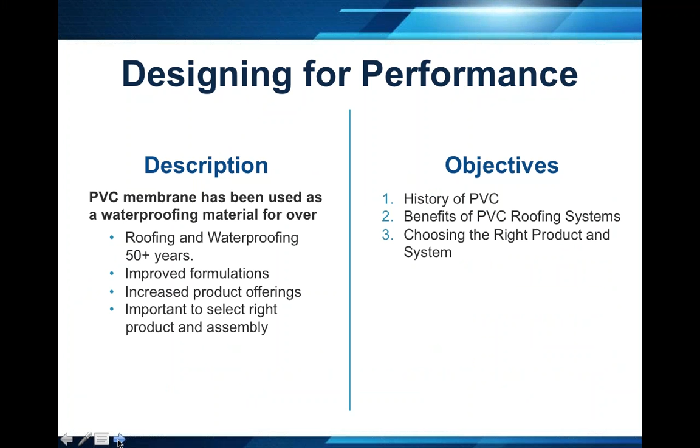We'll cover the history of PVC, the differences in the formulations of PVC, the different ways that PVC is installed, and we'll look at some of the different types of reinforcements for PVC.

A look to start off with two red cars. They will both get you from point A to point B, but other than that, there are big differences in the performance characteristics of the two red cars. Just because they'll get you from point A to point B doesn't mean they're produced exactly the same and have the same performance characteristics, and that's really the same thing with most products that are produced. There's big differences in the way you can produce them, formulate them, etc.

When we talk about PVC, there are differences in the formulations of PVCs, but in general, PVC is considered a very high-performance single-ply roofing product because it's very chemically resistant and it is environmentally responsible.

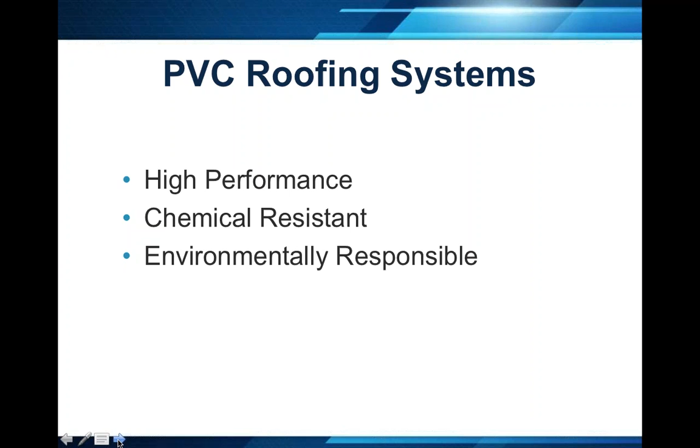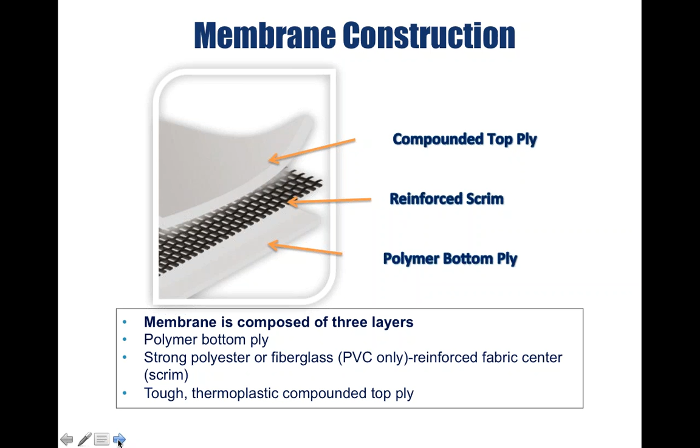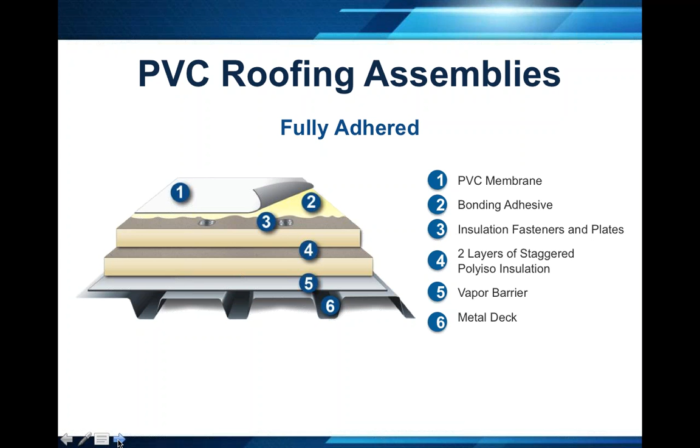Typical ways that we would install PVC roofing are mechanically attached applications. In this slide, you have a 22 gauge metal deck, multiple layers of insulation, and a fully adhered membrane. You can also have a vapor barrier where needed and appropriate, with insulation systems. PVC is also used in fleece back systems, which we'll talk about a little later in the presentation.

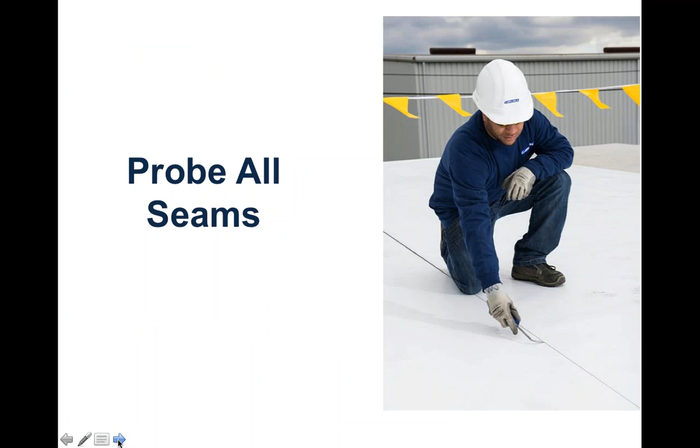All these systems will use heat welded seams. They are a thermoplastic product, and at the conclusion of heating the seams, you'll let it cool approximately 30 minutes, and then you'll probe the seams.

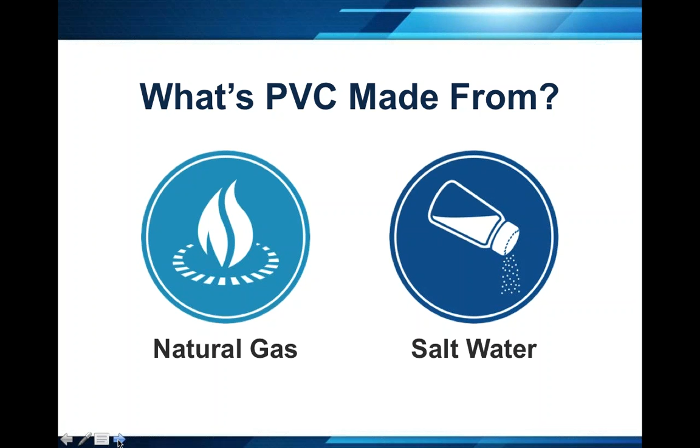A little history: PVC's two main ingredients are natural gas and salt water, so it is not a petroleum-based product. You have natural gas, which you'll crack to extract ethylene, and then salt water will go through an electrolysis process to extract chloride. Combining those two ingredients, you'll come up with a vinyl chloride monomer gas, which will be exposed to UV light, and that will turn it into a white powder PVC resin. Of course, it takes a little bit longer than the brief description I just gave you, but that's the long and short of the ingredients that go into PVC.

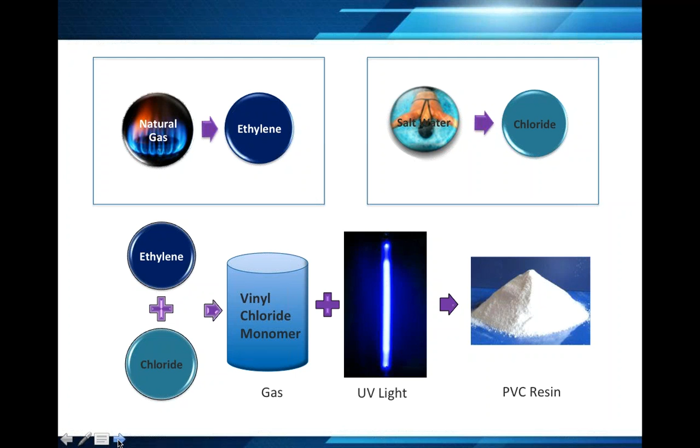From there, you can add plasticizers to that PVC to give it varying degrees of flexibility. So PVC can be rather stiff and hard, or it can be rather flexible. In the roofing industry, it's going to be rather flexible.

PVC has been around since 1838 and first started being plasticized in 1926. It's used in a wide variety of products: the medical industry, saran wrap, shower curtains, grill covers, and many other applications.

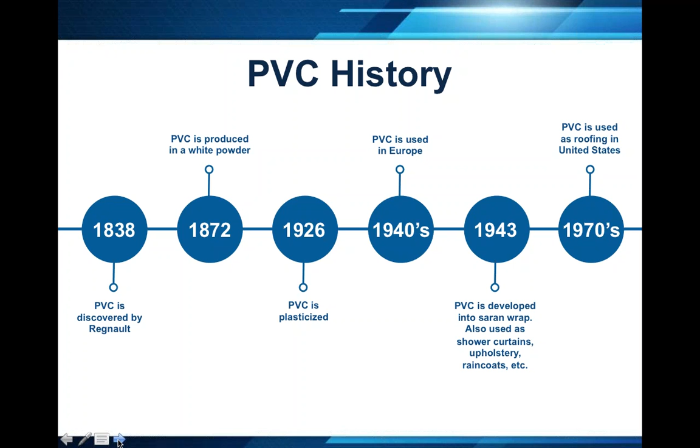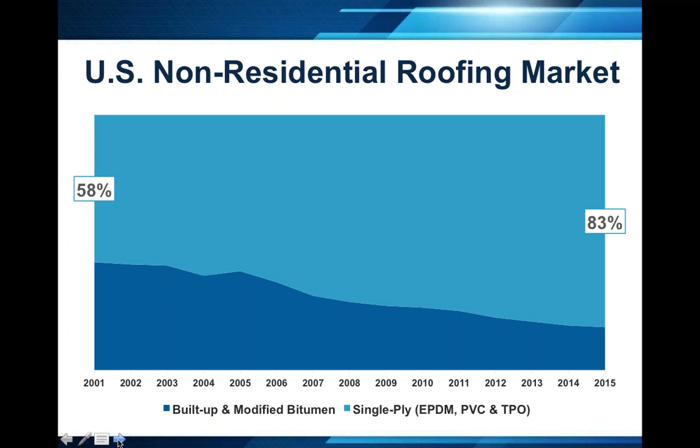PVC, as part of all single-ply roofing, has been growing in demand continuously for the past 15 years. Back in 2001, single-ply only accounted for 58% of the total low-slope roofing market. As of the end of 2015, single-ply roofing—meaning EPDM, PVC, and TPO—accounted for 83% of the total low-slope roofing market. So single-ply in general has been on the rise, and there are many reasons for that: one being ease of installation versus other product categories, cost is always a consideration, and there's been a growing demand for white reflective roofing over the past 10, 15 years as well.

PVC is also involved in a lot of different product segments within the PVC category. You have standard polyester reinforced PVCs, which is the largest percentage of PVC roofing applications, and you have fiberglass reinforced, strictly used for fully adhered applications.

As mentioned earlier, you can have fleece back, which is a polyester fleece on the bottom side of the PVC membrane. There's also a formulation called KEE, an enhanced plasticizer for PVC, which we'll get into later. PVC can also be made into various colors. Typically it's sold in white, but there's gray, tan, and specialty colors. There's also a metal profile product, a rib used in conjunction with the flat membrane to replicate the look of a standing seam metal roof.

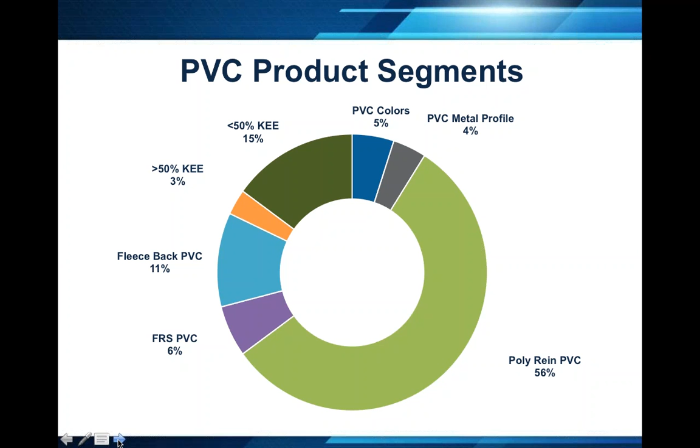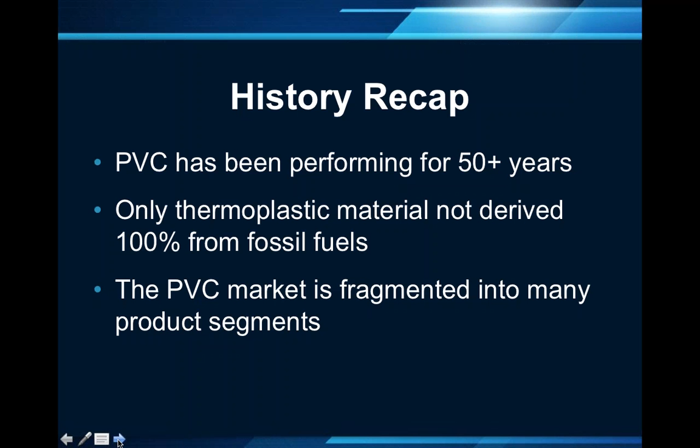Quick history recap: PVC has been performing in roofing for over 50 years, and it's the only thermoplastic single-ply membrane that doesn't come 100% from fossil fuels. And we talked about the various fragmented sectors of the PVC markets.

Some of the key benefits of PVC: the biggest benefit is that it has a long-lasting track record, being used in the U.S. for over 50 years. Of all the single-ply systems, PVC is the most chemical resistant, in terms of jet fuels, diesel fuels, also animal fats and vegetable oils.

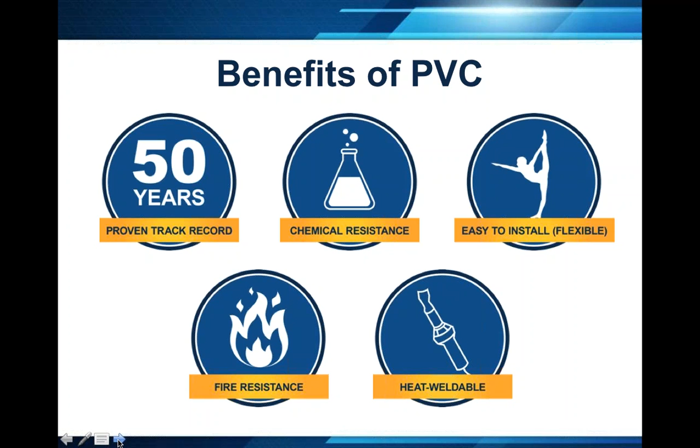The other nice thing about PVC is that it is very flexible in both cold and warm temperatures. And of all the single-ply systems, it is the most fire resistant, and we'll talk about that. Being a thermoplastic product, the seams are heat welded, so you're not utilizing tape or adhesive for adjoining side laps and end laps of this sheet.

Talking about fire resistance, PVC has the best testing for spread of flame and burning brand. Spread of flame measures the distance a flame will spread in a certain period of time. This is important because if you have a fire within a structure, you don't want flames coming out of a window and over the top of the roof system and spreading. Burning brand is resistance to embers that might land on the roof from a structure on fire, perhaps next door.

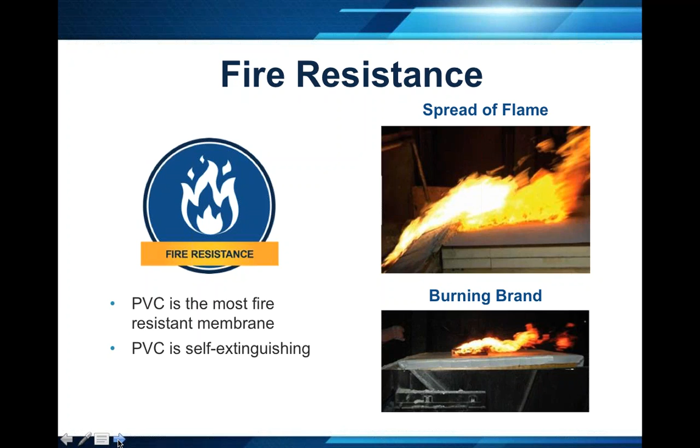One of the things about PVC is that for burning brand, it is self-extinguishing, so it doesn't contribute to that source of fire. From a workability standpoint, the heat welded seams with PVC actually have a bleed out, so you can see that you have a proper weld if you're looking at some bleed out in that weld. It's a key difference between a TPO and a PVC product.

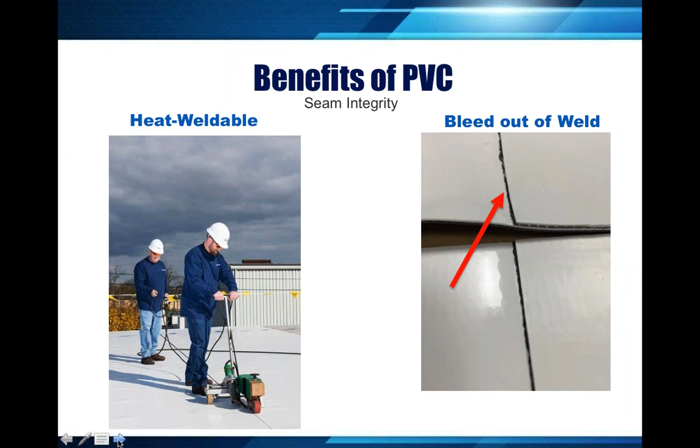It's a very sustainable product as it has a long lifetime. You can recycle PVC membranes that have been in place. In the manufacturing process, there is not a lot of energy used to produce the product. So with the recyclability of PVC, you have a lot of environmental attributes for the product. Because it's white in color, it can contribute in certain market areas to potential energy savings due to reflectivity. But each market is different, so you have to check the specifics of the location you're in.

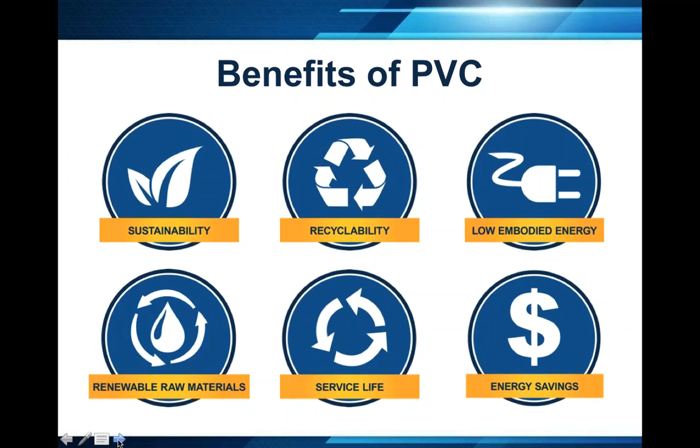That weathering package is contained in the top ply of the PVC membrane, so that top ply will be more expensive than the bottom ply. That top ply has to provide heat resistance, UV resistance, and abrasion resistance for foot traffic.

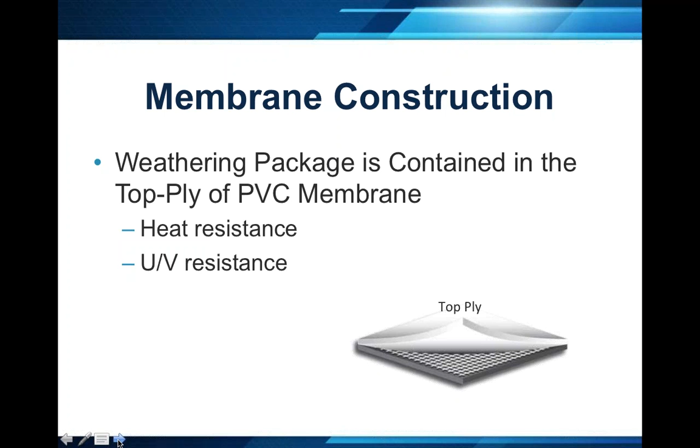The common types of reinforcements: the most popular is a polyester reinforced sheet. As mentioned earlier, there's a fiberglass reinforced product for fully adhered applications only. You have KEE, ketone ethylene ester, and KEE HP, high performance polyester reinforced, and then fleeceback, reinforced typically with fiberglass, but it can be reinforced with polyester as well in certain instances.

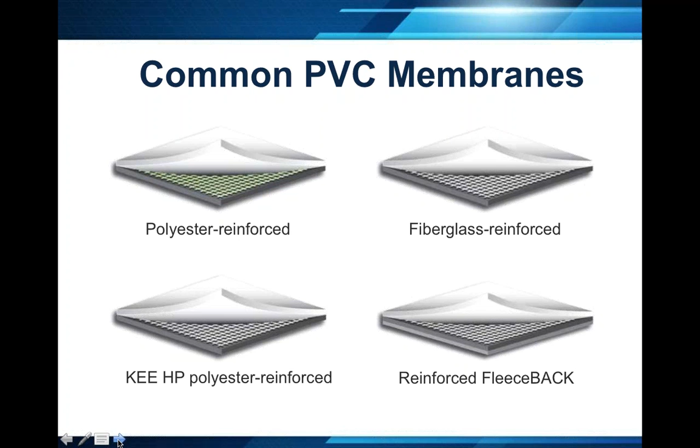The main ASTM standard for PVC is ASTM D4434, which calls for physical properties content and polymer content—two aspects to that standard. You have to have a 50% or greater PVC polymer content, and there's a minimum thickness criteria and minimum thickness over scrim. The minimum thickness is 36 mil, and the minimum thickness over scrim is 0.016.

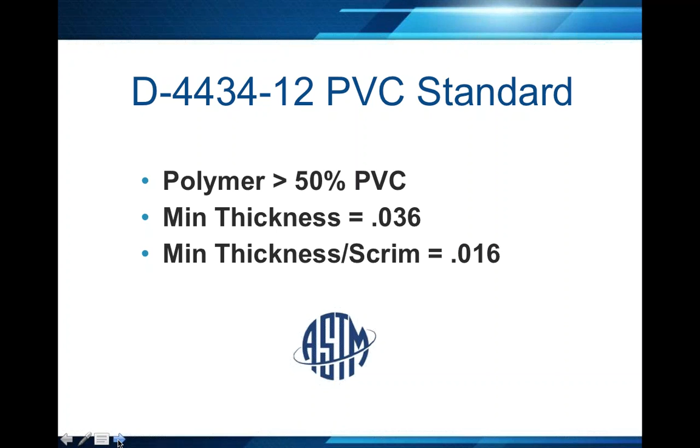Within that ASTM, there are different types. You have type 2, which is fiberglass, and type 3 and type 4, which are polyester reinforced. They have different minimum thicknesses and differences in tearing and breaking strength between type 3 and type 4.

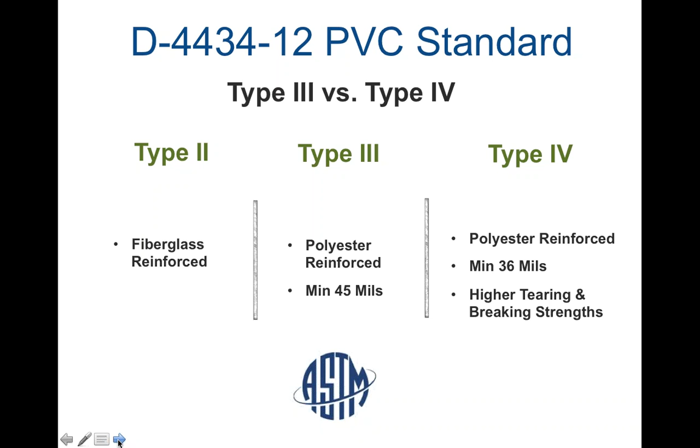For example, type 4 would have a higher breaking strength, 38% greater than a type 3 material. It would have 66% greater elongation and 100% greater tearing strength in type 4 versus type 3. So ASTM D4434 type 4 would provide you with the best characteristics in those categories.

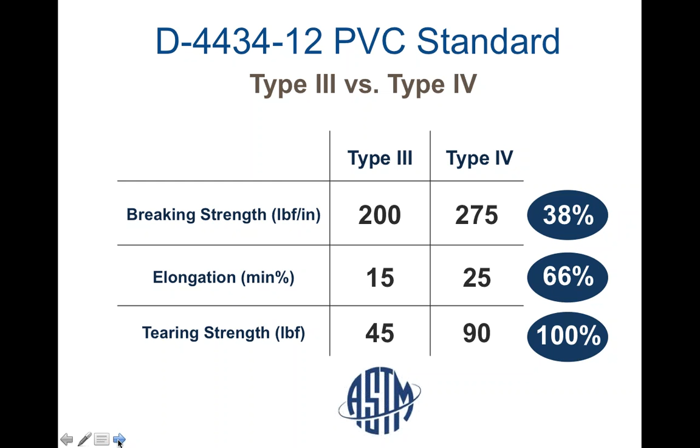When we look at the difference between a polyester and a fiberglass reinforcement, if it is mechanically attached, it has to be polyester. So we're really looking at a fully adhered application.

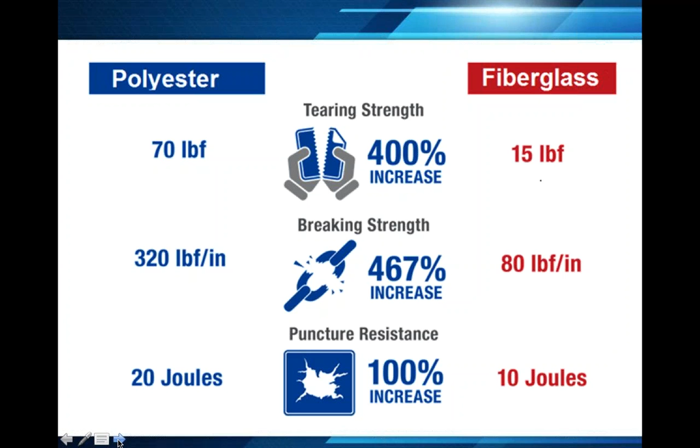In that fully adhered application, polyester would provide a 400% increase over fiberglass in terms of tearing strength, fiberglass being kind of brittle. It would also have a huge breaking strength increase of 467%, and much better puncture resistance than fiberglass. The reason fiberglass is ever used is because in a fully adhered application it does have the best linear dimensional change.

That is the one benefit of fiberglass, but it's really a minimal difference between fiberglass and polyester. So there are manufacturers that allow either polyester or fiberglass in a fully adhered system, and others that simply use fiberglass for fully adhered.

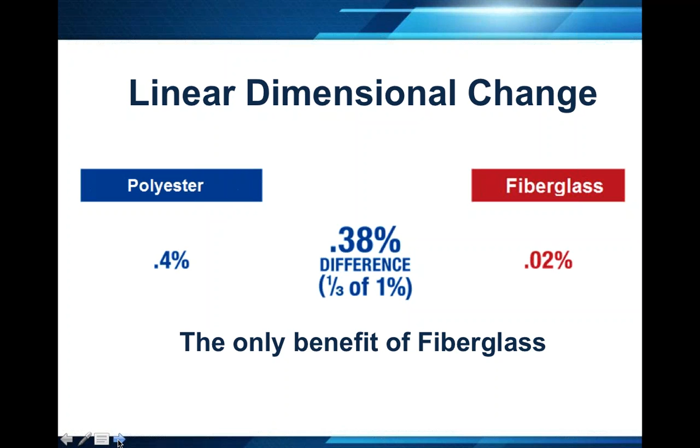One of the things in that ASTM is the thickness over scrim, which is a very important component of the manufacturing process. It's also an area where you can distinctly change the characteristics, going back to that analogy of the two red cars. You want a proper amount of thickness over scrim.

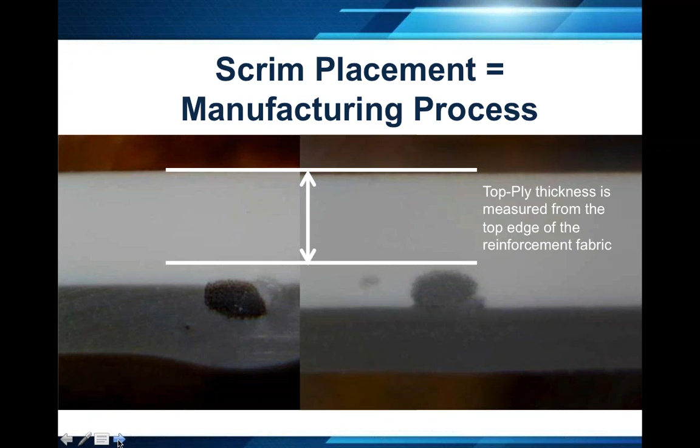You don't want your total thickness to come from the bottom ply. You want it to come equally top over bottom, so it should be centered.

Looking at it under a microscope, there's a key difference in the top ply versus the bottom ply, and there's a lot more cost in the top ply. So you want an adequate amount of top ply over the scrim.

Sometimes you'll see in a microscope excessive bottom ply, and that reduces the weathering performance of that same 60 mil product.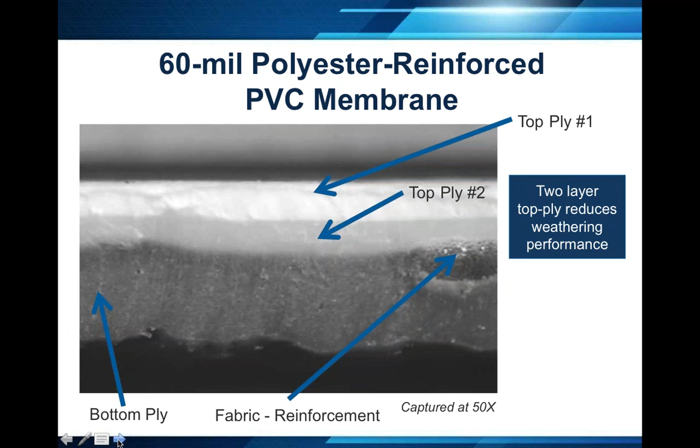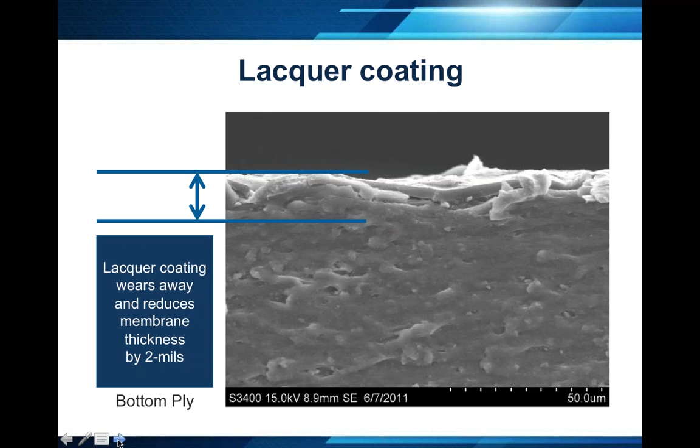Other products have thickness over scrim, but they also have a couple different layers on top of that scrim, or a type of coating on top that resists dirt, which is a small percentage of the total thickness. So there's various ways that PVC is manufactured.

A benefits recap: of all the single ply systems, PVC has the best fire performance testing. It is a sustainable product in that it can be recycled, and it is a low energy product to produce. PVC uses heat welded seams, no tapes or adhesives, and the weathering package will be in the top ply of thickness over the scrim. So beware of membranes with a thinner top ply.

There will be published thickness over scrim in most manufacturers' product data sheets.

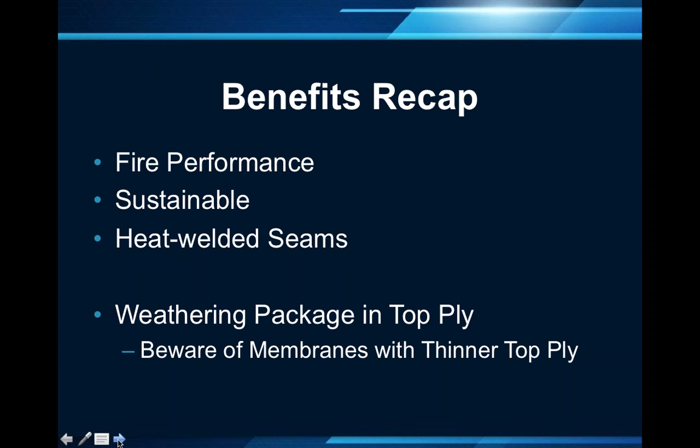KEE, ketone ethylene ester, is a plasticizer enhancement, and it provides higher performance characteristics. It is a more expensive plasticizer enhancement, remembering that plasticizer provides the PVC with long-term flexibility.

KEE was developed back in 1973. Typical plasticizers are liquid plasticizers, and this ketone ethylene ester, developed by DuPont, is a solid high molecular weight polymer. It's a much heavier molecular weight product that will not leach out of the product over time.

So the sheet will remain flexible for a longer period of time, and it also enhances the chemical and oil resistance of the product as a result of that.

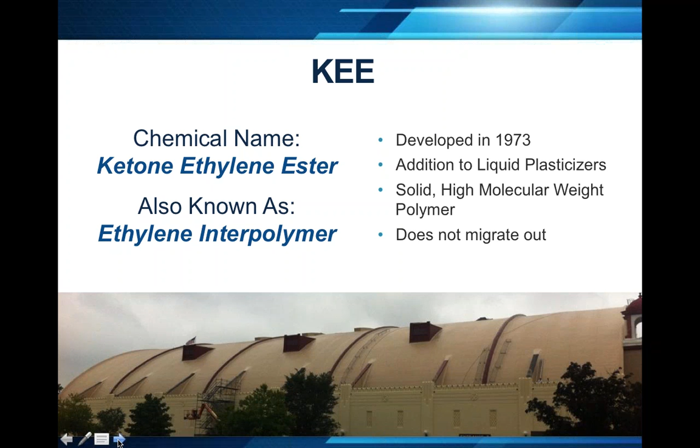Typical formulations use liquid plasticizers, whereas KEE is a solid plasticizer additive.

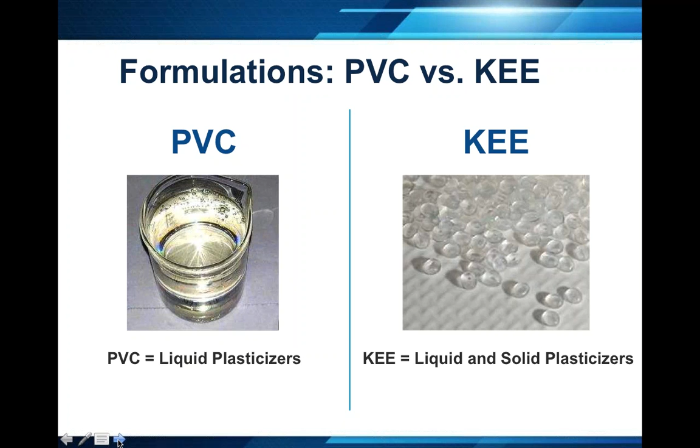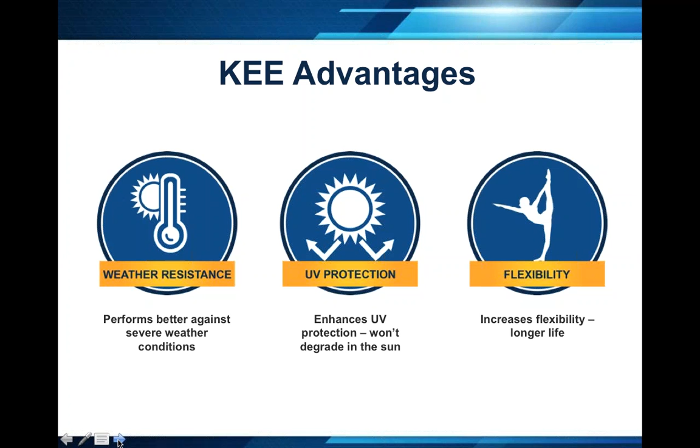A key advantage to maintaining that plasticizer is longer term weather resistance, which gives it better UV resistance and provides longer term flexibility in both cold and warm temperatures. But the real difference is in performance versus diesel fuels, jet fuels, and animal fats and vegetable oils.

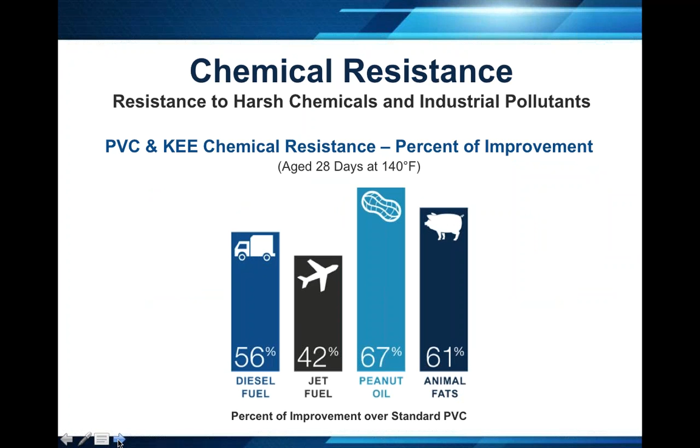PVC being a thermoplastic product, there are a lot of prefabricated flashing accessories that are available. There are square tube wraps, split pipe seals, inside and outside corners, and there are prefabricated curb wraps.

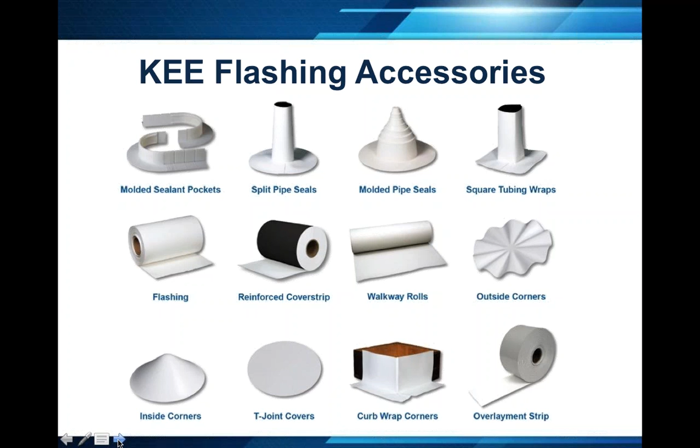One of the key differences between KEE products and standard PVC products is that KEE products will smoke less when welded. PVC products do tend to give off some smoke. It's an irritant, you can smell it. It is not classified as dangerous to the installer.

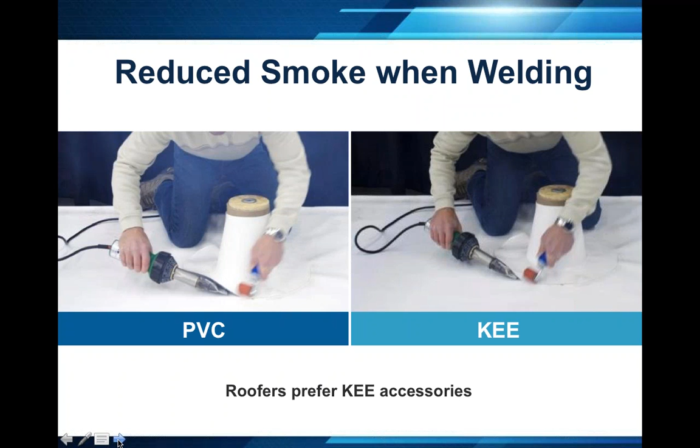And KEE products tend to smoke less than standard PVC products. The other key attribute with the KEE is that with that longer term, heavier plasticizer, it tends to resist the accumulation of dirt over time.

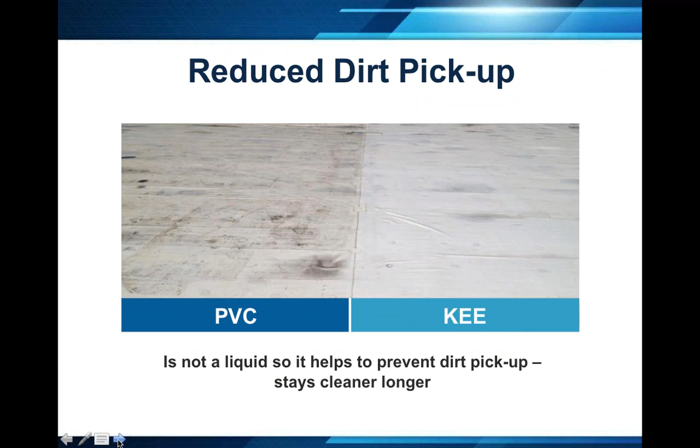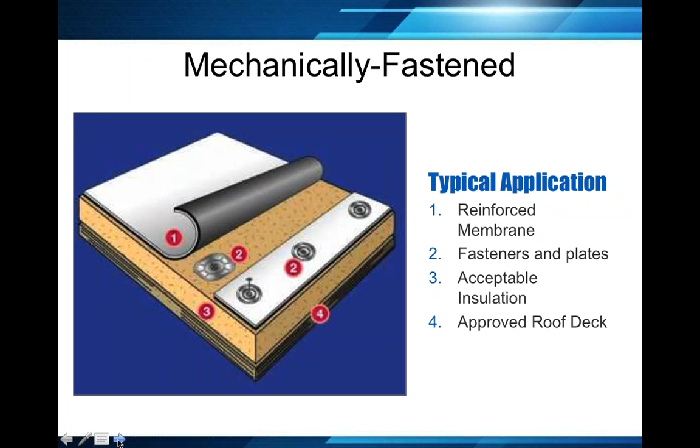So choosing the right product and system. There are mechanically attached systems where you have mechanically attached the insulation with fasteners and plates and then fastened in the seam.

There's also the fully adhered option, and there are a number of different types of adhesives. There are low VOC adhesives, and there are water-based adhesives for standard PVC as well as KEE products. You want to keep in mind as we head into the winter months, there are temperature restrictions on certain water-based bonding adhesives and low VOC products.

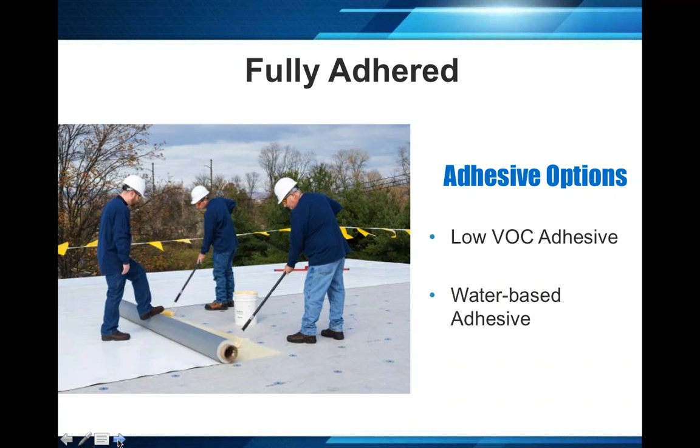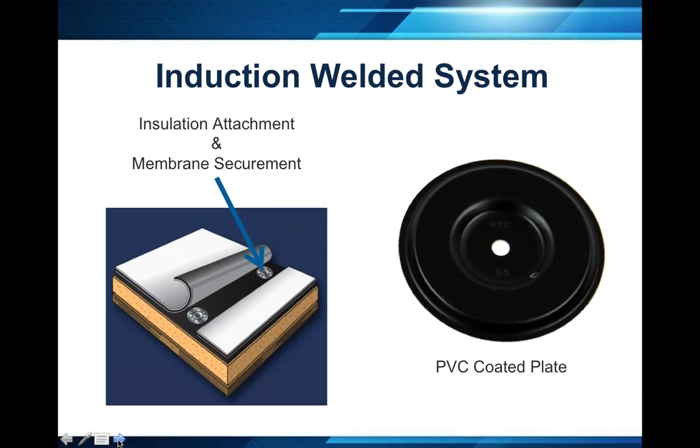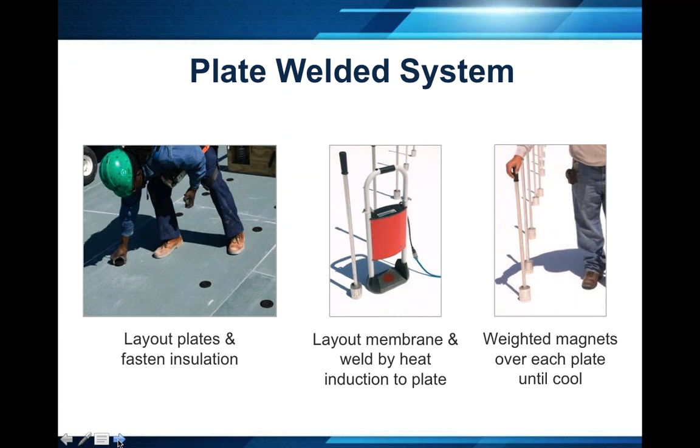There's also an induction welded system where there is a coating of PVC on the top of the insulation plate, and so there are patterns for attachment of the insulation. Then there's a machine that you'll use to induction weld the bottom of the membrane to the top of the plate. After you induction weld, you'll place a weighted magnet over that plate till it cools, and it provides pretty good attachment at a lot of different touch points than a standard mechanically attached system. So an induction welded system is kind of a hybrid between a mechanically attached and a fully adhered system.

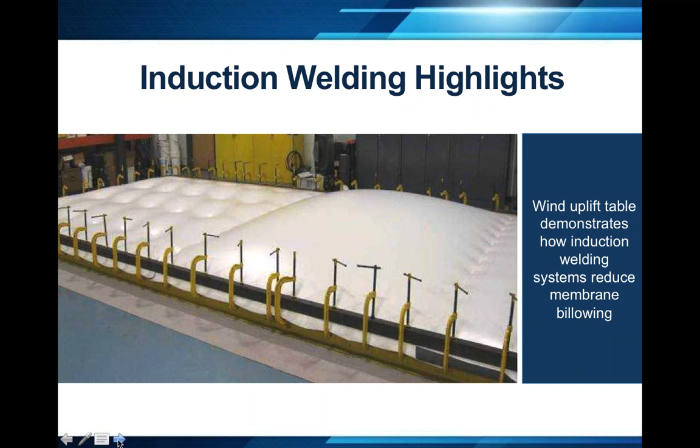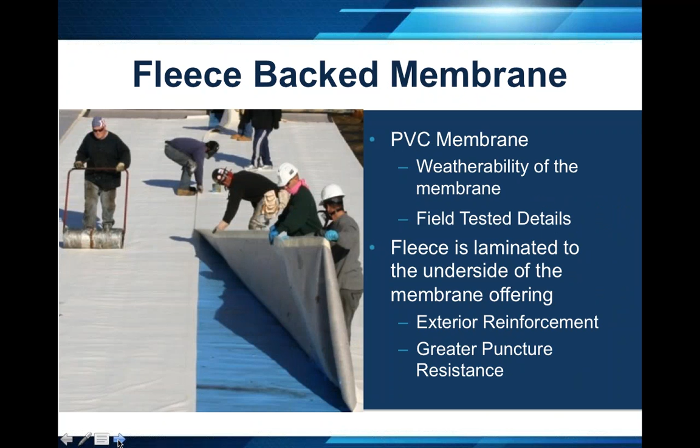PVC is also available with a fleece back, and the fleece back is a polyester fleece that is on the bottom side of the membrane. The key attributes of fleece back membranes are that it has enhanced puncture, hail, and uplift resistance. The results are pretty dramatic in terms of the resistance to hail and puncture.

The other thing is, if you're doing a re-roofing application, it's a very quiet installation. You can actually utilize the same adhesive for insulation attachment as you would use for membrane attachment, so there's minimal disruption for interior occupants if using this type of product in a recover or re-roofing application.

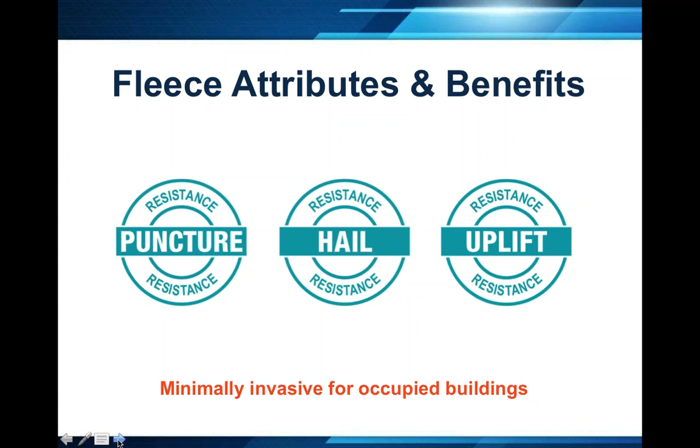That polyester fleece dramatically increases the puncture resistance of that membrane, and it outperforms in ASTM D5635. PVC outperforms modified bitumen in terms of puncture resistance.

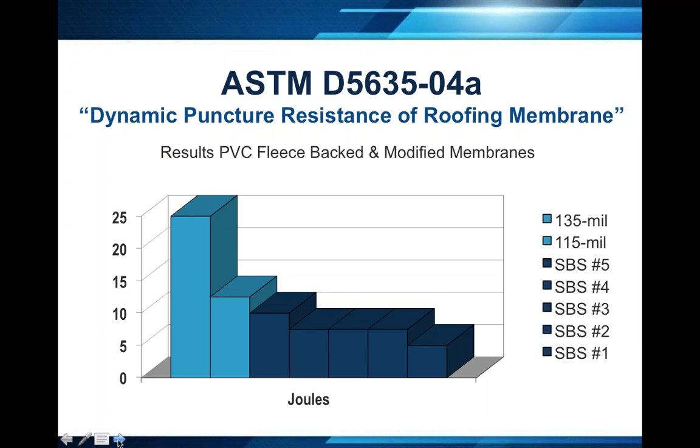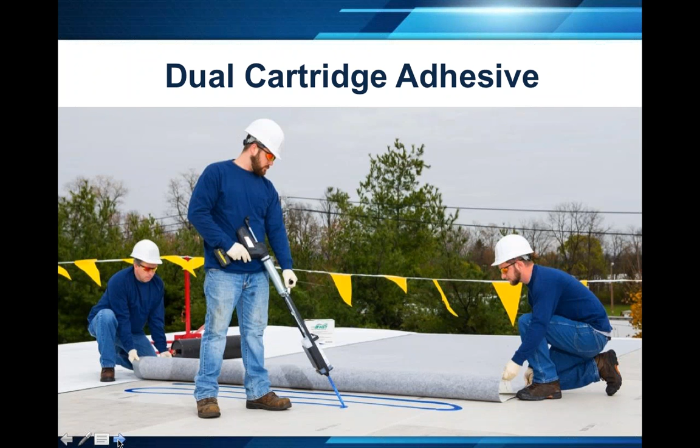So take a look at the fleece back installation. The adhesive for a fleece back installation can come in a number of different ways.

It can come in a dual cartridge adhesive, and in this case it's being dispensed in a ribbon form, and there are different patterns of ribbons that can be used for fleece back application. Keep in mind, for this type of adhesive, there are also, as we head into these colder temperatures, some restrictions and guidelines that need to be followed for proper storage of materials and installation of adhesives in colder weather.

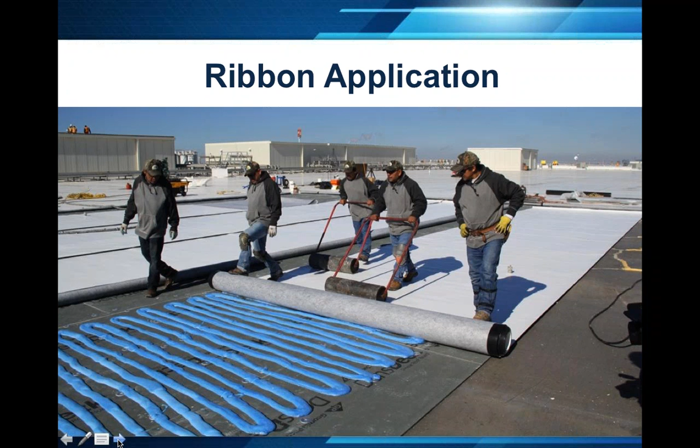Once that adhesive is dispensed, it will be in a liquid form, and then in a minute or two it will rise to a foam, and we do what's called a string test to that rising foam, and then we'll set the membrane into that adhesive.

Upon completion of that, we want to roll that in with a 150-pound weighted roller, because depending on the bead spacing of that adhesive, you don't want that ribbon telegraphing visually through that membrane.

So one of the things we want to do is definitely check that string time, let that adhesive rise, but not wait too long, so there is a window of opportunity there. One of the things you can do to minimize that is to have a little tighter bead spacing, and definitely want to hit it with the 150-pound weighted roller once that membrane is placed into that adhesive.

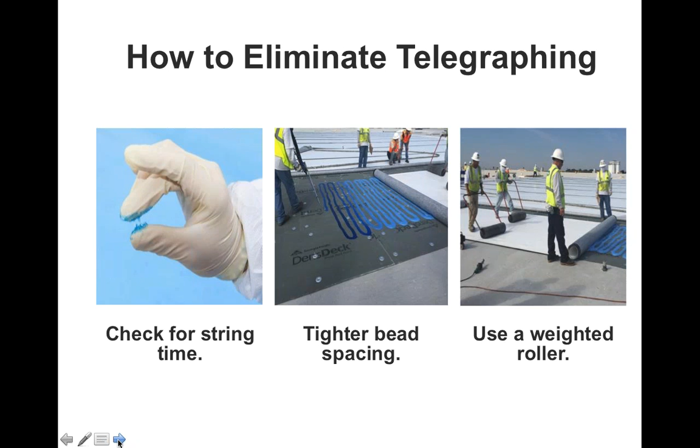You don't want to spray the adhesive in areas where it's not intended to be, so you do have to take some precautions. This is a low VOC product. Of course, they're wearing protective equipment, but it is a low VOC.

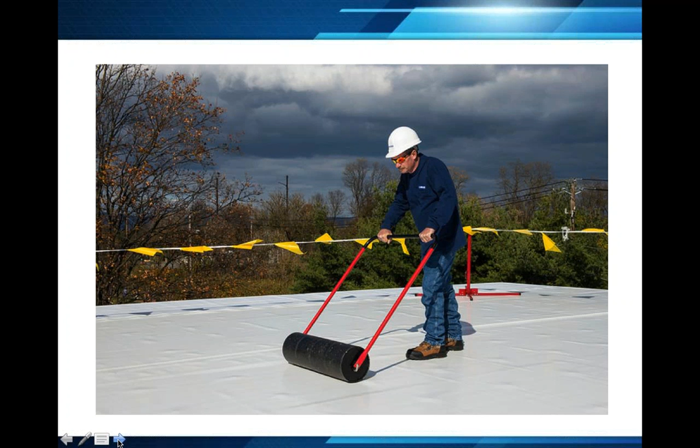It's really important to get good adhesion of that membrane into the adhesive. The 150-pound weighted roller is very important upon completion of installing that fleece back membrane.

Another interesting application is the PVC rib profile. You have PVC ribs, and you can replicate the look of a standing seam metal roof. This comes into play in areas that are challenging, maybe a dome or any number of circumstances that would lead you to an actual standing seam roof. But from a cost perspective, the PVC rib is a pretty good value versus standing seam metal.

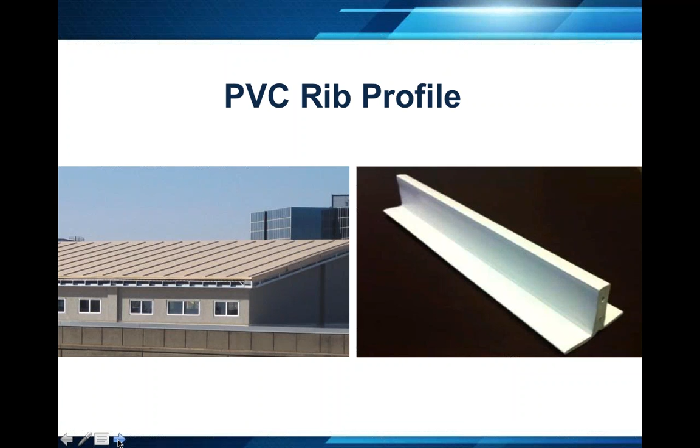You want to use the fleece back membrane, since that would hide the fasteners and plates from telegraphing through the membrane. So you heat weld that rib to the membrane, and that can come in a variety of different colors.

A little products recap: ASTM D4434-12 Type 4 has the strongest testing for breaking strength, tear strength, and elongation. There are several attachment methods for PVC. You have mechanically attached systems, bonding adhesive and fully adhered systems, fleece back available with a urethane adhesive, and an induction welded system.

As far as KEE, ketone ethylene ester, that is a plasticizer additive, a high molecular weight plasticizer that provides greater flexibility in cold and warm temperatures, and the most chemical resistance in terms of petrochemicals, animal fats, and vegetable oils. It also does the best job of resisting dirt accumulation on a clean white roof.

As far as fleece back PVC membranes, that fleece back is a polyester fleece on the bottom side of the membrane, and it provides enhanced puncture, hail, and wind uplift resistance.

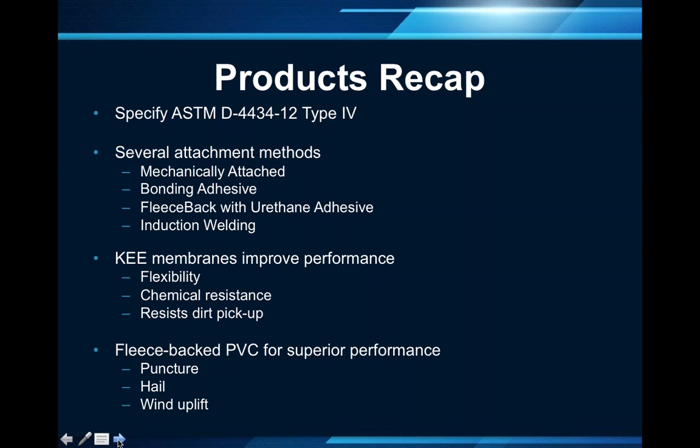Right now I'll take any questions that you have, because this will conclude the AIA portion of the presentation.

One of the questions was, can you use KEE flashing materials with standard PVC? The answer is yes, you can use KEE products with standard PVC products.